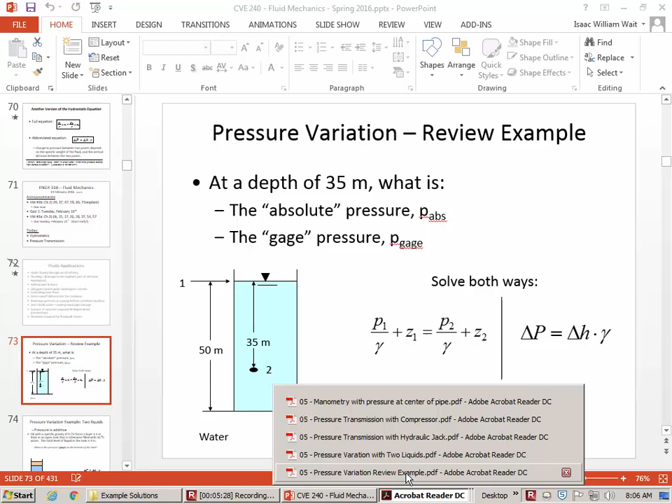So let's just take a look at the PDF of it and see if it makes sense. All right, yeah, this is the one.

Okay, so it says that it's water. We have a unit weight of 9810 newtons per cubic meter. I'm using the bottom of the tank as an elevation datum, so that makes Z1 50, Z2 15. If we're solving for the gauge pressure, then we say P1 is 0. If we're solving for the absolute pressure, then we say P1 is 101,325 pascals, the standard atmospheric pressure. I've done it two ways. The first way is the full hydrostatic equation where we're substituting in the known elevations once I rearrange to solve and isolate P2 as the unknown. So here you can see the unit weight, then the pressure head term. Remember that when we rearrange pressure and divide it by the unit weight, we call it pressure head, and it has elevation units of meters. So the pressure divided by unit weight, the units will work out to meters, and that's why we can add it to the Z values, because they also have units of meters.

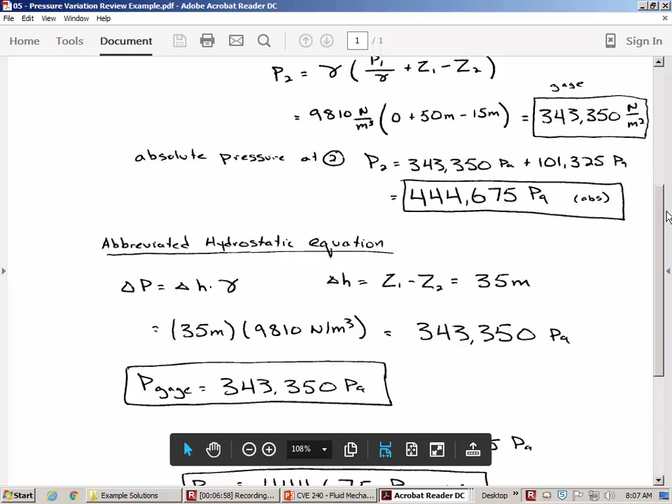But here, P1 was 0, so it just cancels out entirely. Okay, so here's our pressure in terms of gauge when you are that depth under the water, or the absolute pressure, you're simply adding 101,325 to that. So the abbreviated hydrostatic equation is even a little bit easier because we're just saying what's the change in pressure from the surface down to the point of interest.

We're saying that the pressure at the surface starts off as 0, so all we really need to know is the change. So the change in depth is 35, the change in pressure is going to be 343 kPa. And then same thing with the absolute, just adding 101.325 if it's kilopascals, or 101,325 if it's pascals. So I think you get the idea. Any questions about this illustration, just to remind you what's going on with the hydrostatic equation?

You'll have another reminder of the hydrostatic equation when we take that quiz on Tuesday.

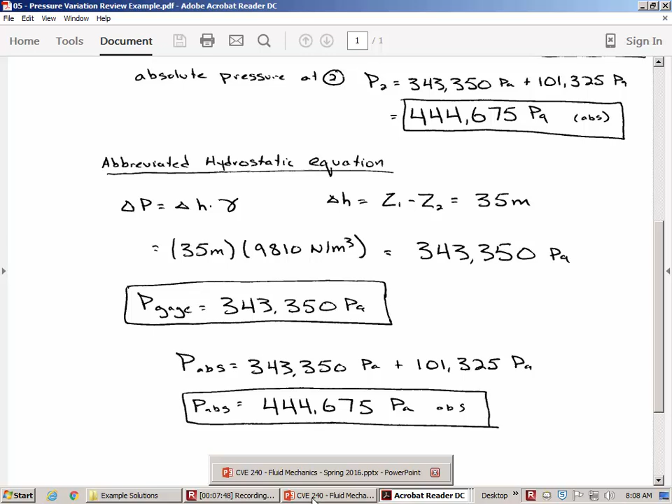Why do you take Z2 as 50? Oh, 15. Because I'm saying that here the bottom of the tank is Z0. And if you look at the dimensions, it says it's 50 to the top and then 35 from the top down to point 2. So 50 minus 35 means that the elevation from this datum up to point 2 is 15 meters.

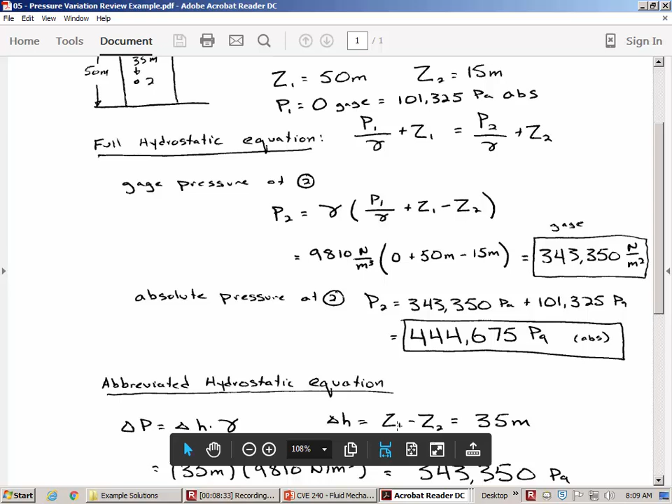Delta H is the difference from the surface to wherever you're trying to find the pressure. And in this one, we're trying to find the pressure at point 2.

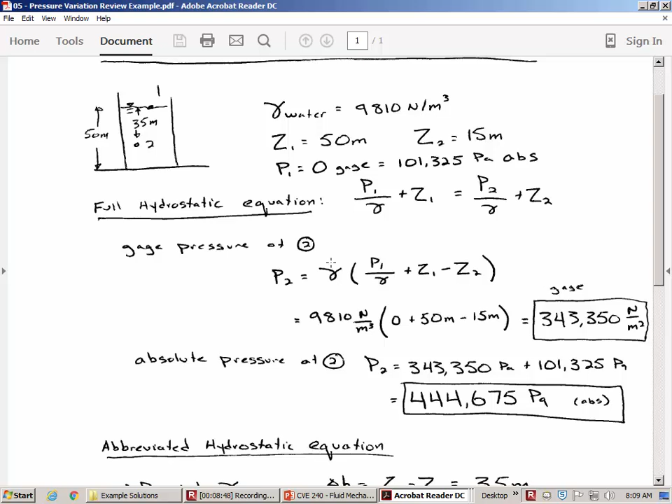Other questions? Well, not that example, but the topic of the hydrostatic equation is on the quiz. That's the focus of Chapter 2.

All right, so another application of the hydrostatic equation is what if you have two different liquids? Because what we've been doing so far is going down through just one fluid. But in this one, we've got an oil layer on top of a water layer. I'd like you to solve this one. I'm actually going to pause the recording and stop talking so that you can try and figure this one out. Let's just talk through it together and then let you solve it.

First of all, I'm going to bring this up so we can do the dimensions a little bit easier. Okay, this is oil. And what do we know about the fluid properties? We know that S, the specific gravity, is 0.75. And then here we know that this is

water, and the properties of it, it's at 10 degrees Celsius. Well, if you look up in the back of the book, the unit weight for water at 10 degrees Celsius is the same as our default unit weight, 9810 newtons per meter cubed. We know that the total liquid level in the tank is 4 meters, and the oil layer is 1.1 meters.

The principle is, the way you solve it: start at the top, go to the interface, find the pressure at the interface, and then go to the bottom. The reason you have to do it in two steps instead of one is that when you're applying delta P is delta H times the unit weight, you've got two different liquids. So you go through this using the unit weight of the oil, and then using the unit weight of the water. Collaborate with your colleagues on this one, and let's find the pressure at the bottom of the tank.

Over here on the whiteboard, I reminded you how to use S. This is something we talked about during fluid properties, so that should be in your mind already, how to find the unit weight of the oil if all you're given is the specific gravity. The specific gravity is relative to the unit weight of water, or relative to the density of water, depending on what you're trying to find. In our case, we're trying to find the unit weight of oil, so it's a ratio.

So it's 75% of the unit weight of 9810 newtons per meter cubed. That's how we find that the unit weight of the oil, in our case, is 7357.5 newtons per meter cubed. Let me bring up the solution for this one.

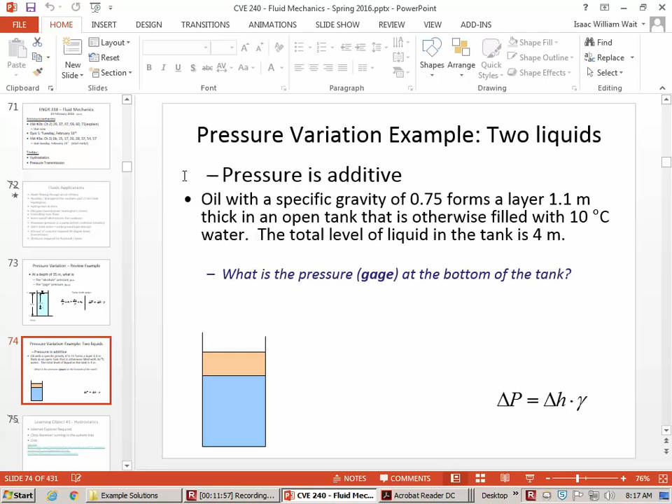You can see I did the drawing, just because having the drawing on your own, I think, is a good habit that will help you avoid mistakes and help you visualize the problem a little better. So the first thing I did was take care of my fluid properties, finding the unit weight of the oil. Since we're working this in gauge, that means the pressure at the surface is 0. You can see I've labeled locations. Location 1 is at the surface where I know something. I'm starting with a known, working towards the unknown.

The known location is the interface of the air and the oil. So the pressure of the air is 0. That means the pressure of the oil touching the air is also 0. As I go down through the oil, the pressure is accumulating and increasing. Location 2 is the interface between the two liquids, and location 3 is at the bottom of the tank, where I'm trying to find the pressure. So I do it in a progressive way.

P1 is 0. P2 is P1 plus the delta P. The delta P is the change in pressure that occurs as we go down through a distance of 1.1 meters of oil. The increase in pressure is 8093 newtons per meter squared, and that's added to the P1 of 0 pressure. So that's the pressure at the interface of the liquid.

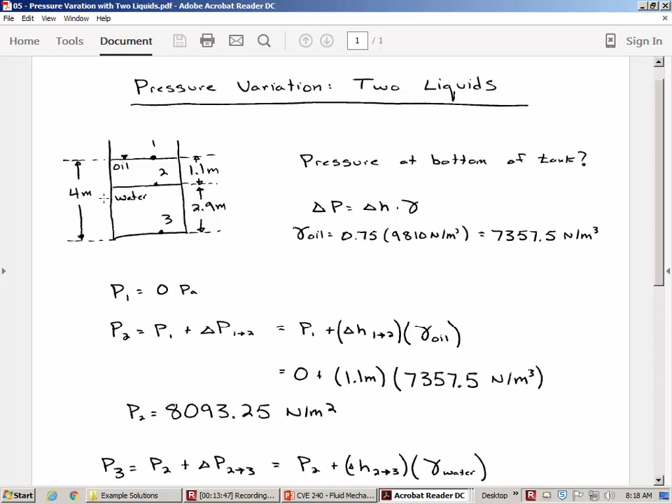If we zoom in, like with a microscope, at the interface of those two liquids, the oil pressure and the water pressure are exactly the same where the two liquids are touching. But if you go down even just a little bit through the water, the pressure starts to accumulate again. In this case, the distance we go down through the water is 2.9 meters, because we do 4 minus 1.1, which gives us the vertical distance between location 2 and location 3.

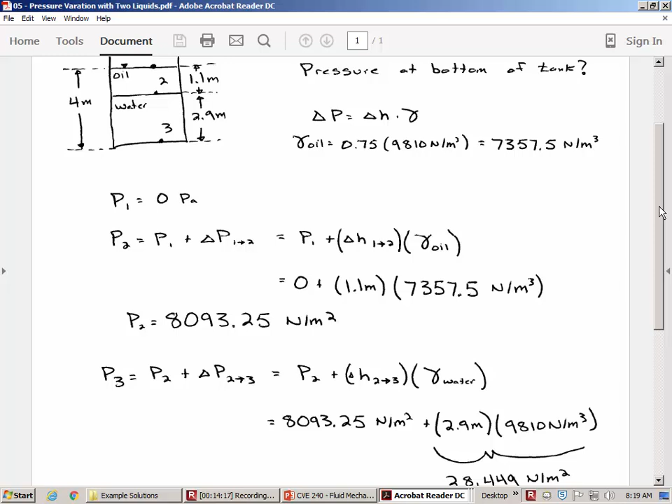Remember, you can go sideways through a liquid and the pressure doesn't change at all. It's only when you're going down that the pressure increases, or if you go up through the liquid, the pressure is decreasing. Okay, so ultimately, here's the answer: 36.5 kPa.

Well, there's maybe a few equations you need to memorize. For example, I would expect you to memorize how to use the unit weight. Whether you know the definition of S or whether you consider this memorizing an equation, this is something I wouldn't give you — I wouldn't define S for you. But I would provide the hydrostatic equation at the bottom of the page on a quiz.

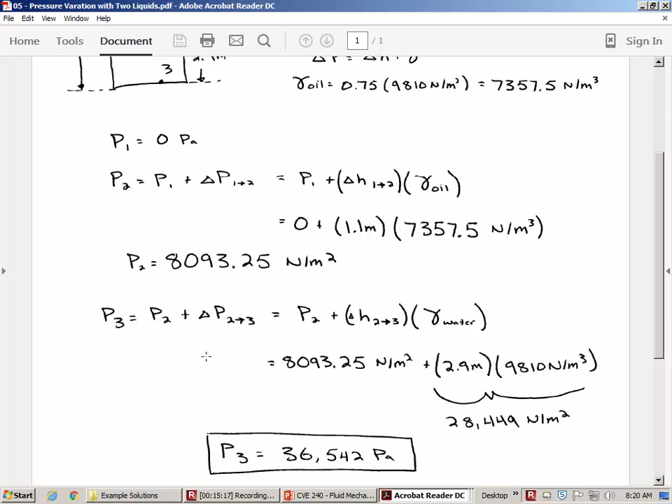Questions about the example before we move on? That's right, thanks for asking. Yes, this is the gauge pressure. And if we wanted to know the absolute pressure, then we'd just add 101,325 to that. Good question. All right.

All right, this is some interesting stuff. I'm excited we get to talk about this today.

So maybe you've seen a car lift before. When you've taken your car into the agency for maintenance, they can lift it up off the ground, and oftentimes the way they do that is with a hydraulic system.

So imagine here is some sort of air compressor. It's taking atmospheric air and forcing it into a small space, this tube that connects the compressor to a greater reservoir full of air. Now this air is pressurized, and because it's pressurized, it's pushing down on the liquid inside the hydraulic system, which is oil.

So the air is pushing down on the oil, and there's pressure. As we go down, the pressure is getting a little bigger. As we go sideways, the pressure is the same, it's not doing anything. As we go up, the pressure is decreasing just a little. So assume these are about the same elevation—if we counted pixels it might look like this line is a little higher, but let's just say those two elevations are the same.

So what it means is that the pressure down of the air pushing on the oil is the same as the pressure up, the oil pushing on the face of this cylinder. This is a circular cylinder here—if I was trying to draw that in 3 dimensions, it would look like that. It's a circular cylinder, and the oil is pushing up on that face. Does everybody visualize what's happening here?

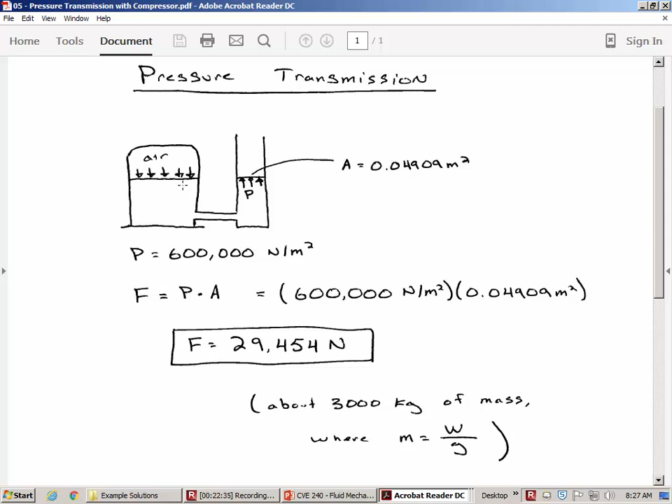All right, so I've done the little drawing of the system. You can see I'm reminding myself that what causes this pressure acting up is the pressure in the air pushing down on the liquid. Pressure acts in all directions - it's a scalar, not a vector. So that's why pushing down with the air can cause the pushing up here, as we go down and sideways and then back up again. These are at the same height, so it's the same amount of pressure.

So it's 600,000 newtons per square meter multiplied by the area of the cylinder. This isn't the area of this tank, it's the area here - you can see I've noted it's pi d squared divided by 4, how I got that area. And that works out to 29,000 newtons approximately. If we divide the force, which is a weight, by G, 9.81, that's about 3,000 kilograms. So that's a heavy car - maybe a Mercedes. Mercedes are usually pretty heavy, right?

So any questions about pressure transmission?

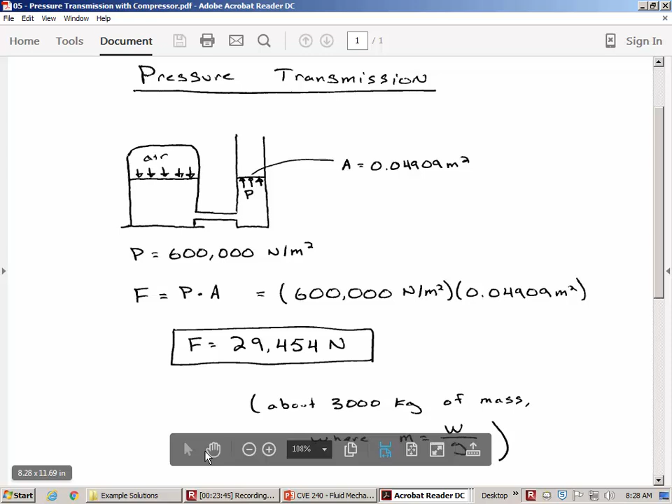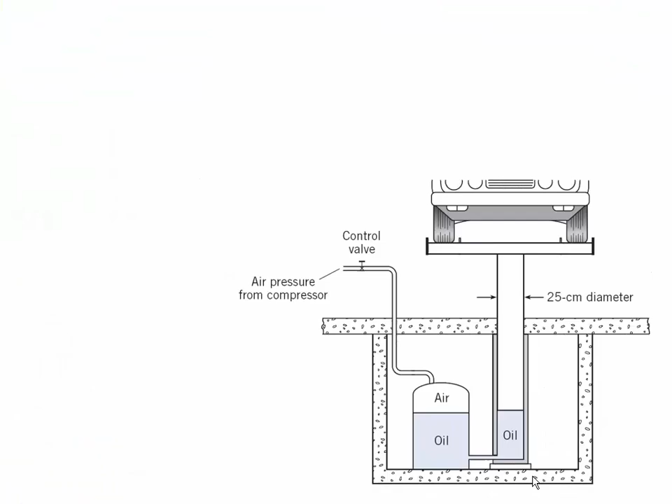So it gets even more beautiful, or more complicated depending on how you look at it. We've already talked about the equilibrium situation. What would happen if we turned the air compressor on? So this is stable with the 600 pressure. If we turn on the compressor, it puts more air inside that enclosed space, which increases the pressure, and the cylinder on the right would go up until the pressures are all in balance again, until it reaches the new equilibrium - a little bit higher delta H, because of the increased pressure, delta P.

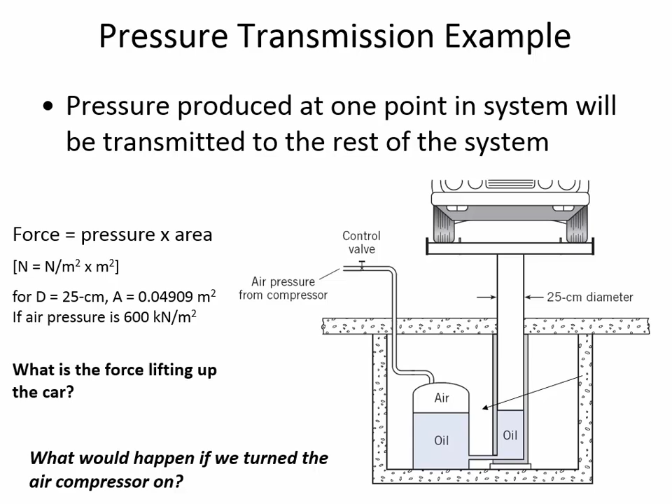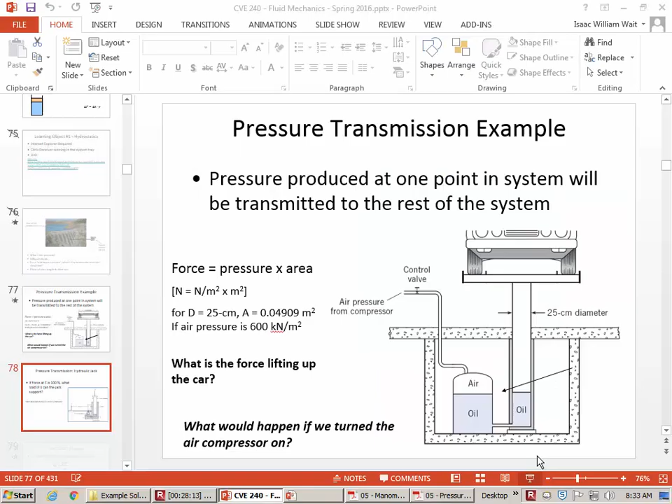And of course, you can work with your colleagues on this one. There's no need to be quiet during these examples. Lots of good solutions out there. All right, let's look at this one.

And then I want to find the area of that part based on the 1.5 centimeter diameter that's given. So I convert that to meters. I guess you could have, in the same way that you could have left this in centimeters, you could do the area in centimeters squared, because eventually you could divide here the area by centimeters squared. But the reason I didn't do that is because I wanted to know the pressure in terms of force newtons per meter squared. That's the more typical way to describe pressure, newtons per square meter rather than newtons per square centimeter.

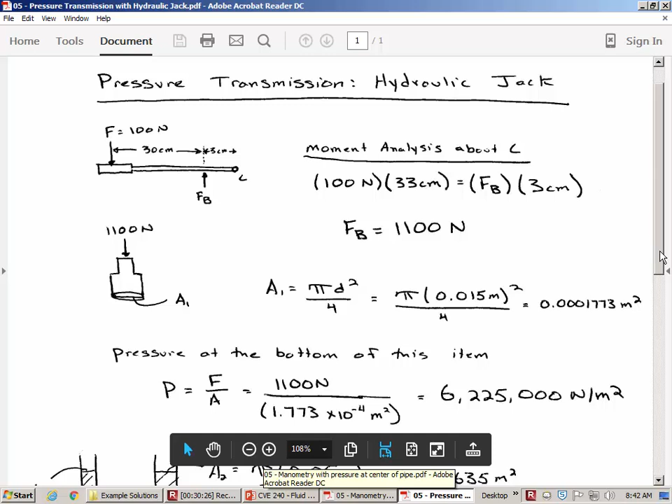All right, so we know the pressure in the liquid. Now I'm taking a look at the fluid itself. So I've got A1 and a calculated A2 over here, and then a little drawing just to show that the pressure is pushing up on that secondary cylinder, and we know the area of that secondary cylinder, calculated that, and so the force it can lift is 12,222 newtons, so approximately 12.2 kilonewtons. That's the load it can lift.

What if this was 10 centimeters instead of 5 centimeters? What would happen to this force if we doubled the diameter of that secondary cylinder? It would increase, quadruple. It would be 4 times greater because remember it's pi d squared, right? So you could really lift some heavy things just by making it larger and larger area, and you wouldn't have to push any harder on the handle.

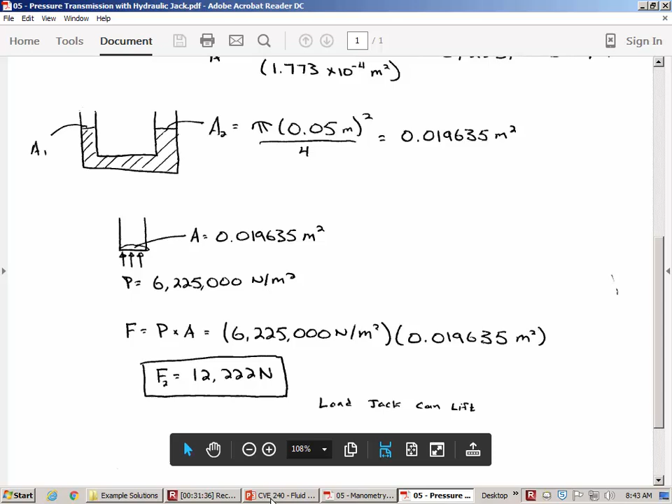So if you want to lift something heavy, the key is a long handle, and then it's better to have a small area on this side because that causes a high pressure. The smaller this is and the bigger this is, that's what amplifies your ability to lift.

All right, so now that you've seen this example and worked it and you've got your notes to keep with you, I think you'll have an easy time tackling the homework problems that relate to this same idea. That's why I give you the suggestion to start early on the homework, is because it's fresh in your mind right now. It won't be fresh in your mind Saturday night, after a long weekend.

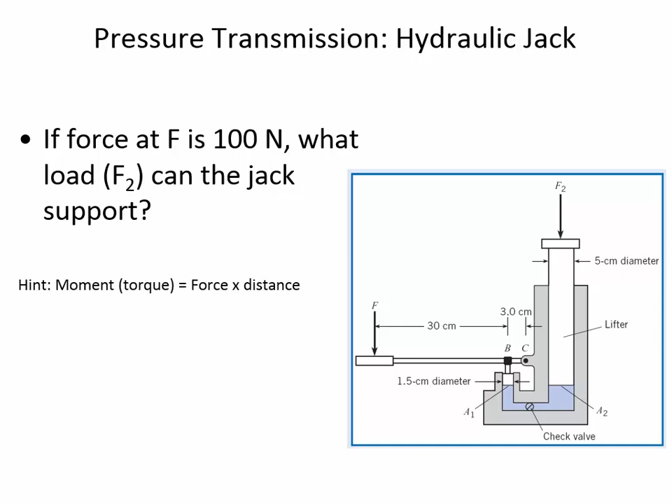So if you started this today, then you'll really be doing yourself a favor.

The last thing we're going to talk about today is to begin envisioning ways to measure pressure, because until now we've just been saying here is the pressure, just by definition it's a certain amount. But we have instruments we can use, very simple ways of measuring the pressure.

One of the most obvious is something called a piezometer. Consider a pipeline, maybe buried under the road, carrying water. The water is flowing through the pipe, and we want to know how much pressure is there at the center of the pipe. One of the very easy ways to measure the pressure of liquid in a pipe is if we poke a hole in the pipe.

Now, if that's all we did, water would be spraying everywhere. It would be a disaster. But if we poke a hole in the pipe and connect it to a tube that goes up some distance, the liquid level will rise into the tube, and eventually it would stop, assuming the tube is tall enough to contain all the liquid. If the tube wasn't tall enough, it would just spray out. But let's say it's a very, very tall tube. The water will rise until the height of water in that column is in equilibrium with the pressure in the pipe.

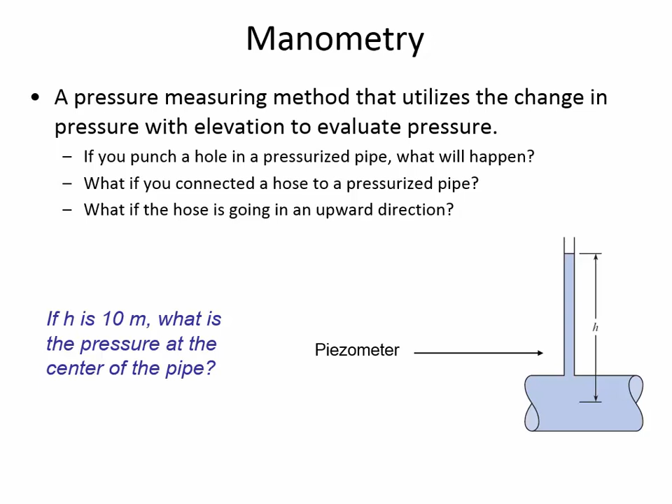So there are better devices than this for measuring pressure. You don't see in the middle of the road these gigantic 50-meter tubes going up into the air for people to measure the pressure. But this is the simplest, and so we're going to start talking about measuring pressure with piezometers. And if it's 10 meters, then all you do is multiply: delta P equals delta H times gamma. So for a 10-meter head, what is the pressure? Very simple: 10 meters of water is the same as 98.1 kPa.